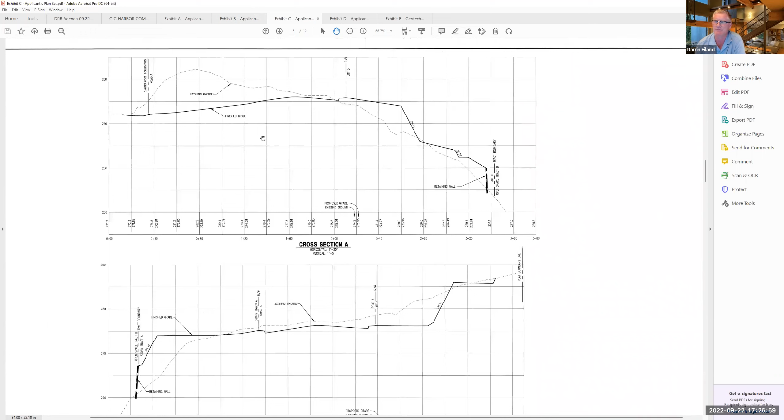And so looking at this, basically everything in here, I don't know if they necessarily correspond with your cross sections. The cross sections may need to be updated. As I was looking at that, I was saying, okay, I'm not quite tracking with that, but I'll take these to be more the design intent right now.

And I didn't find any, I didn't take any exception with what you're doing here on the south and the eastern part on the backside of these lots. What I was maybe curious about, as it relates to this area where you're retaining trees, I don't know if any other DRB members have either had a chance to look at Google Earth Street View or been up Canterwood Boulevard and specifically looked at that wall that's there now.

My initial impression of that wall is that it's not that attractive. It does get pretty tall in one spot. And I think since they're going to move it over in order to get some frontage improvements, sidewalks and so forth, it might be an opportunity in this area where it's keynoted to be at 8 feet and 9 feet plus, and specifically some of these areas that are close to that entrance. And I think they're going to be basically right up against the sidewalk that's coming here. Would it be an opportunity to consider a step location in lieu of retaining some of the trees?

And so here comes the dilemma, right? If you push it back and you replant it where maybe this side of the entrance is replanted similarly, it's sort of a trade-off. So I'm just bringing this idea up because I think the wall is right in your face, and we do have some examples in the city, specifically coming up to Burnham at that roundabout by the Sportsman Club, that is excessively high, and there's just no way around that. But I don't think we would like to see that as the norm moving forward, if we can, if there's some way to soften those impacts a little bit.

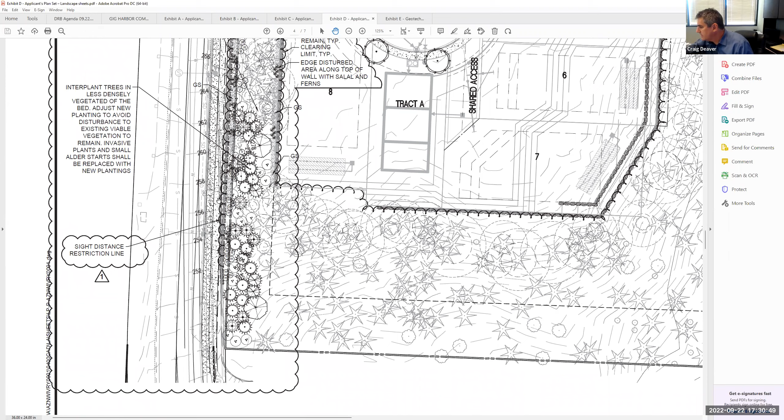No, there's a buffer, isn't there? Yeah, we have a buffer, and then there's a sidewalk. There's a planting buffer, but I don't believe we propose any trees in it. Okay. Yeah, the reason I ask is just in terms of that wall and softening that look.

Some trees in that space would help with that, because I agree that is a harsh wall as you drive by it. So a couple things, if I may, I don't want to speak out of turn, so tell me to be quiet and I will.

But the issue here with this wall is that it meanders in right away and then meanders off right away to the south. And so once we touch it and start messing with it, right there, you see where it curves there? It tapers onto the adjacent property.

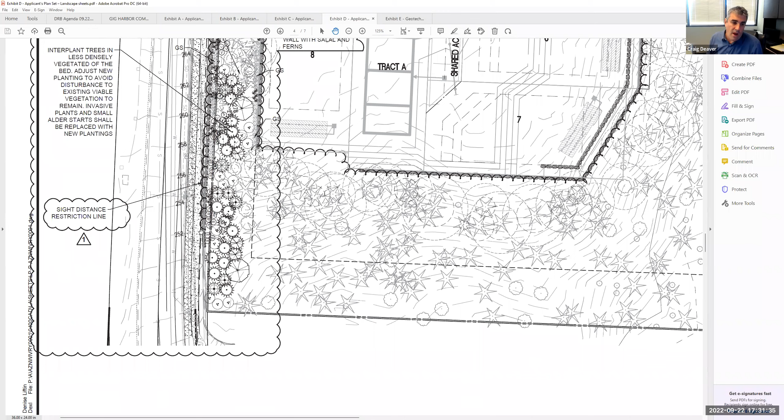So I don't entirely control it. And the next thing I'd like to say is I'm not opposed to stepping the wall, but the problem is that wall is really in there for Canterwood Boulevard, and the wall right now, at least adjacent to our site, has been placed in the right of way as required by the city design standards. If we tier it, a portion of that wall will be a structural wall located in that buffer, which, as you guys know, will have some planting issues, but also that'll be a structural element of that roadway, which will be on private property. So there'll either need to be some sort of easement or something that will allow maintenance of that wall onto the property, or for the city to come in and maintain it if there's ever an issue.

So Craig, you're saying that you have to relocate it and it still gets relocated. This is the property line that's here, right? So you're still in the right of way right here. And if we did have to step it, this wall would stay potentially here, but lower.

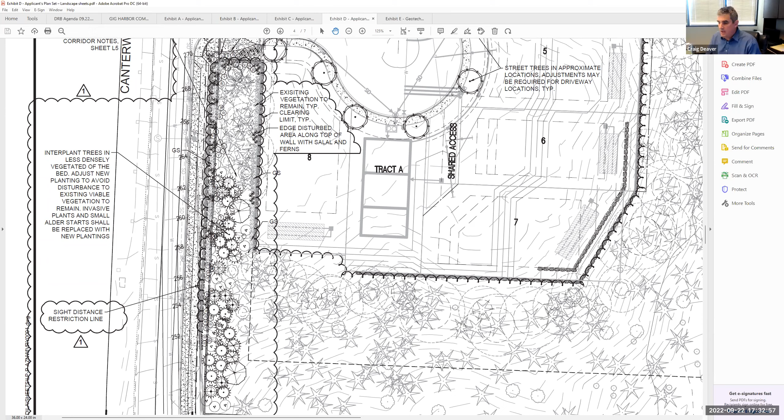And then the second wall would be on the property. Yeah, a tiered wall would place it because you would have to be at least the height of the wall back from the other wall. If you did two 4-footers, you would have a 4-foot wall, then a 4-foot gap, then another 4-foot wall.

Well, I can't speak for Jeff Langhelm and his group at Public Works, but it seems like there could be something that could be done there. I know there's lots of examples within the right of way where the walls are pretty tall, and we've actually had some pretty terse discussions about why Public Works decides to do it that way when the design manual says another way.

So, from a design standpoint, we can't speak to what Public Works would allow or not allow, but it seems like if we could step that wall in these zones, I don't know if it needs to be down in this area. Obviously this is the existing. Is it in this position here still? Yeah, or if you relocate it, could it go there?

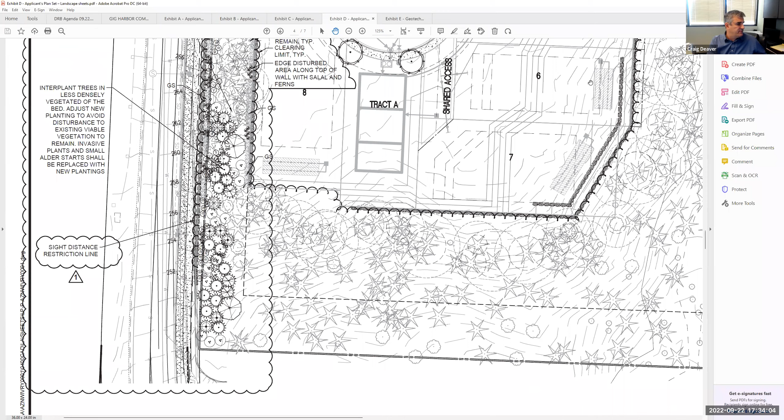If you don't mind, do you have my civil plans? Could you go to sheet C, or sheet 3 of the 19 sheet set? I think that's sheet 3. Yeah, you can see the wall down here in the southwest corner. You can really see it there. If you could zoom in on that portion there.

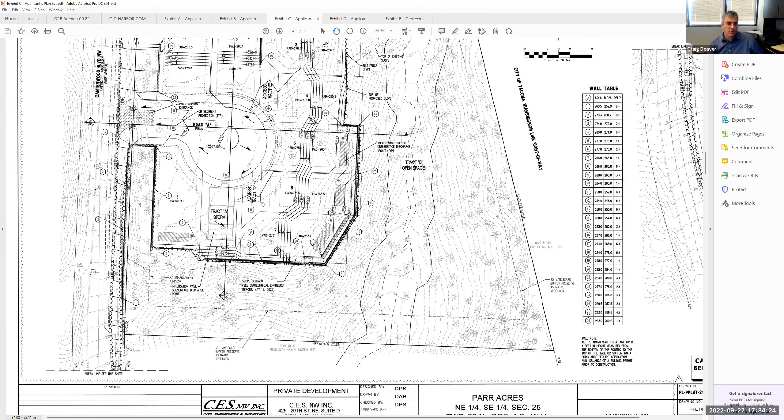Is it 10 feet tall in that corner? Yeah. So this is the existing wall. You can see how it tapers, and the darker wall is our wall. That right there is the end of the existing wall, and the darker wall is our proposed wall. We're just shifting that wall to be more parallel, excuse me, to the right-of-way line. Okay, well, I know that the existing wall probably is also the same height you're talking about. It looks tall, getting into the 8-9 feet plus.

And it's not just 8-9 feet, it does slope up from there as well. So it does look rather, you have all this vegetation up there, and then slope, and then the wall, and it's rather looming over Canterwood there.

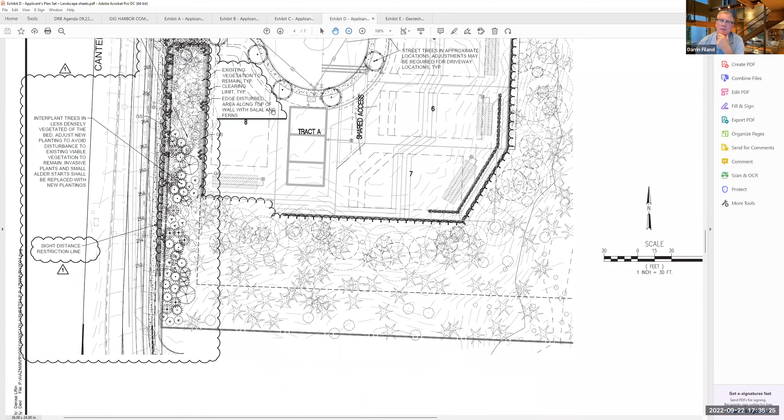Okay, I'll go back to the landscaping plan, I think it's easier to see everything. First we would ask the DRB if the wall, currently designed right at the right of way, is acceptable. We have allowed taller walls here and there, but most often they've been located at the back of the site where nobody sees them. In this case, it's right out in plain view, with just a mow strip, some planting, and a sidewalk right next to it, so you'll see it in its glory.

Craig, is this going to be a brand new block wall or relocating the existing material? I believe we're going to have to make it a brand new wall. Okay.

So if the wall in this area were stepped, what we're conceding is that any trees in this zone, if that topography needed to be changed, we'd be losing more of those existing trees. My thought is if this is planted here, we could replicate some of that in here. I think a better long-term solution would be lower walls, say two 4-footers stepped back with landscaping, for a softer impact. We're already looking at changing the grading here with some enhancement with landscaping.

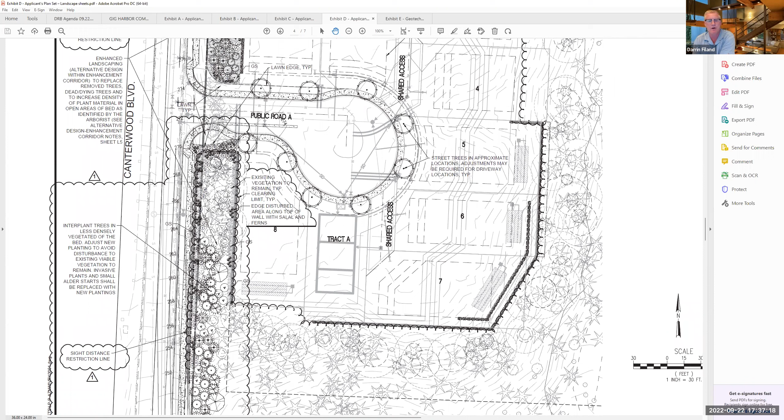John's already commented. I don't know if Brianne or Marlene have anything. Marlene, can you see anything on your phone? Yes, I can see, thank you. I can't see well enough to say I could redesign it right here.

I think we have tried to minimize those tall walls. The fact that you're doing so much significant work on the site maybe gives us an opportunity to minimize those walls.

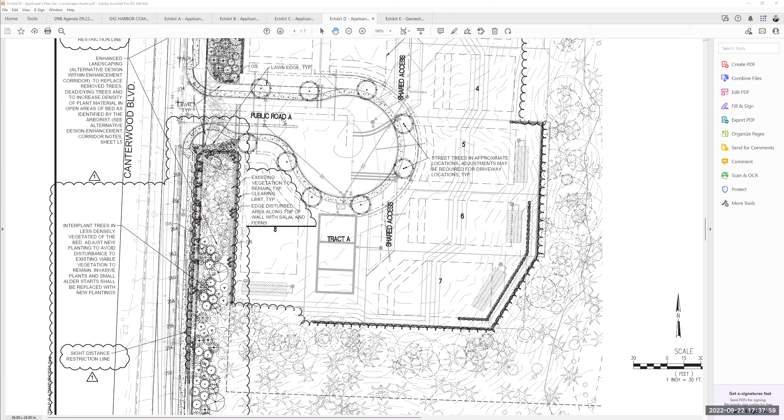So can I ask a quick question? What you're suggesting is that we remove all the trees there, knock that slope area down to match what's going onto our site, and then put in a tiered wall through there, so all those trees would go. We would do a tiered wall system, a rockery or whatever it would be, and then replant that area with trees.

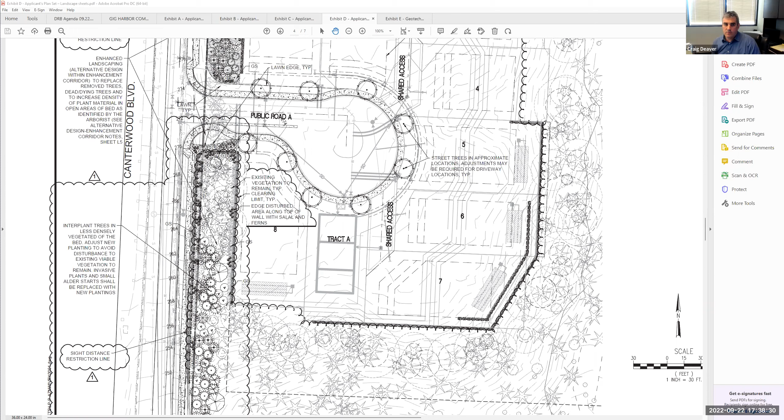Or here at shrub, looking at your keynotes, this wall at this height is 8.5 feet up, and then we're basically at 9.6 running along here. So if we were to split that in half, and as you said, come back 4 feet, I guess it'd be like laying it in here.

Craig, we're just asking a question - if you cut this section here while leaving the topography, are all these trees on the eastern side of this zone also in jeopardy? Yes, because as you move the wall back, you're moving it into a hillside that's even taller than where you're leaving it - it's 4 or 5 feet taller where you're suggesting to move the wall back, so that wall will have to be even taller. Instead of an 8-foot wall, you're looking at an 11 or 12-foot tall total wall, but it's tiered.

That's why I was suggesting kind of knocking the knob off, because there's a high point right where your hand is - a knob right there. If we cut that off, remove all the trees, tier two walls, and then replant it - trees don't really go that well with walls, so we'd be looking at some sort of wall-friendly plants.

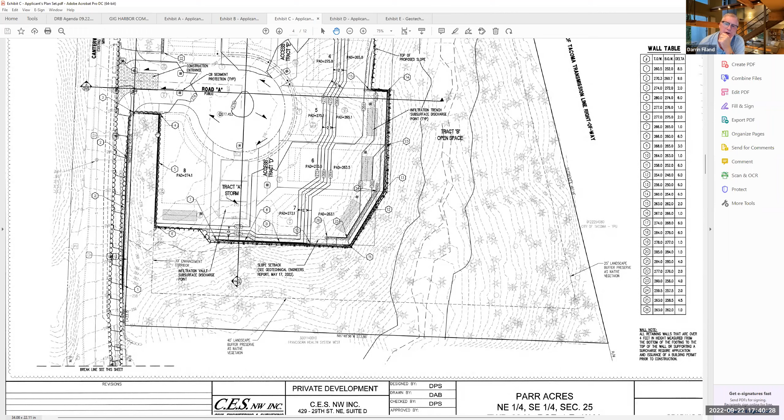How does your lot 8 relate from a topographic standpoint to this area - does it sit lower? Yes, it is lower by about 5, 6, 7 feet. And you have a wall here? Yes, I do, to save the trees as well. Well, that makes a lot of sense. I honestly agree.

Harsh, but I'm thinking we take this nub off of here and you wouldn't need this wall, and we can make this lower and replant this like that. I think it's totally a better solution.

Yeah, I'm only one member. So, no, I agree. We did propose something like that at the time, and we were indicated we had to save the tree corridor, the enhancement corridor, to the best of our ability.

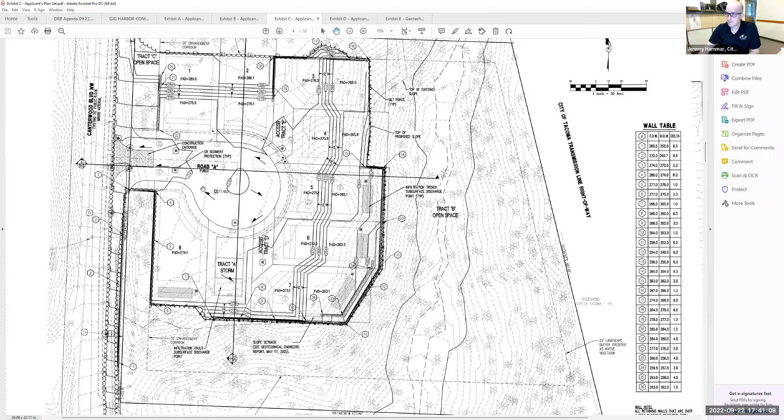All right, well, so any more thought, I guess, from members on that? I was going to bring up Google Earth here and kind of throw that little street view in there for a second. I might be able to just pop it over there. I'll just drag it over here.

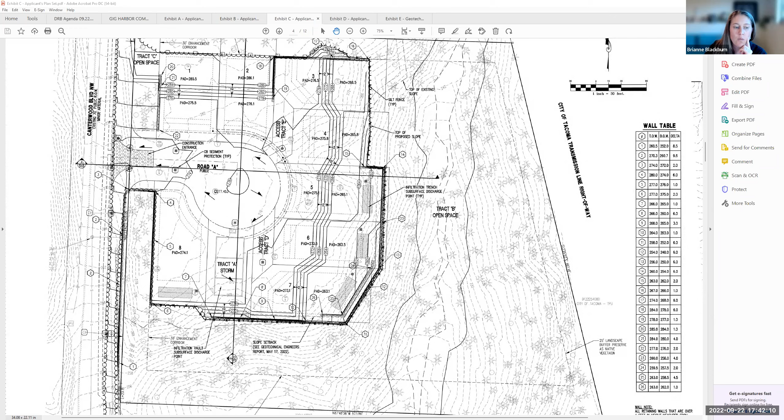This is the wall we're talking about that's there now, right? We're not able to see your street view. We're still seeing the plan set. Maybe I gotta get all the way over. You might have just shared the plan set window, you might have to stop sharing and reshare. Let's try that again. Now we'll try. I can see it. Can you see it now? Mhm, all right, we can see it.

Can I make just a statement while you're going up this hill really quick? I want to point out that the road is not symmetrical with the actual right of way. This road actually diverges from the center line of the right of way, and the wall diverges away from the right of way, and we're putting it back parallel to the right of way. Yeah, okay, fair enough.

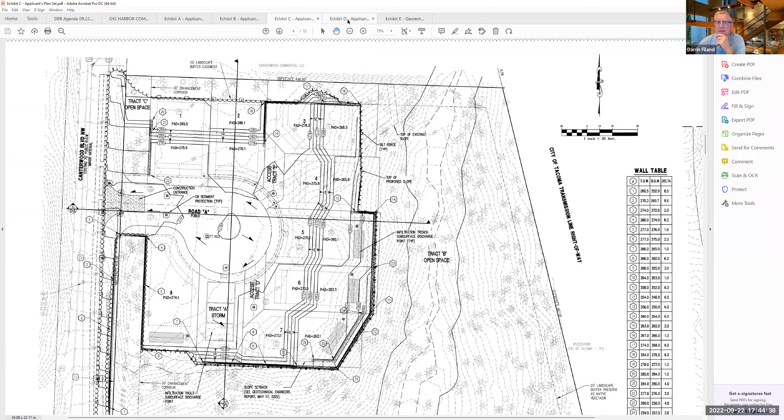My thought on it is that having a tall wall here and then another wall here where it steps back down to save these trees, while I think it's commendable, if we were talking about some really special species in here, then I'd say let's do our best to keep them. But I think this in time will be beautiful, probably even in like a 5-year window, filling in nicely. It seems like we could get something similar in here by taking this knoll out of this. So that's my take on it.

So I have one question. The roof line of the house that's going to be there - so it's going to be a daylight basement, correct? That one's not a daylight, that's a flat padded site.

Okay, so if you were driving down Canterwood and you had a 6-foot wall with 10-foot trees, 8 to 10-foot trees, how much of the roof line and building would you see, since it's kind of down a little bit lower off the knob? You wouldn't see much of that house. So that to me is probably the more important thing - you aren't staring at the side of a house versus the trees that are there right now. So I agree with Darrin.

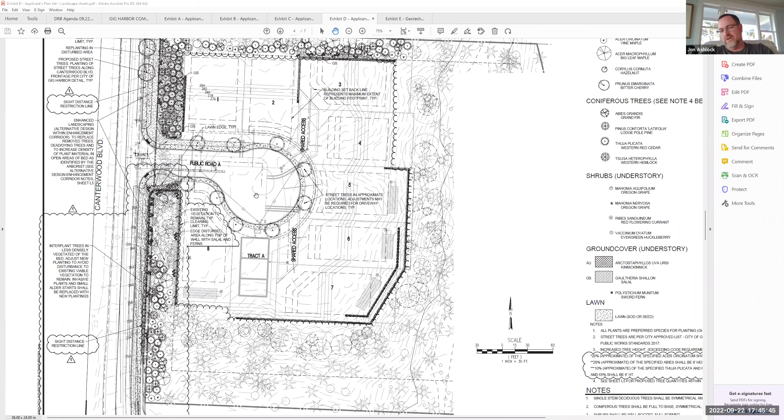If you flatten the knob and get a smaller wall, and then add in trees so you block the view of the house, I think that is superior than what we have right now. Just to be clear, under the current scenario, the house would be pretty much obscured by the walls and the trees being saved, plus the shrubs being replanted. If we come in and knock that knob down and lessen the walls, you're going to see more of the house under the suggested scenario.

Until the trees are grown in, though, right? Until then, but I still think you're going to see more of the house regardless if we take the knob down. I just want to be very clear on that. I like the idea of taking the knob down and getting rid of the walls, but I want to be clear: you're going to see more of the house in the scenario you just suggested.

But to be fair, Craig, would you say we'd see maybe a similar amount of the house on lot 8 as we would on lot 1? Sure. Because this is 278 right out at the road, and there's a 278 contour, it's pretty much right at grade. Yes, you'll see about a similar amount.

So it'd be a consistent frontage, and we've got a bunch of development that's happened on the west side and in Gig Harbor North over time, and it's a little shocking when we take out some trees. The community does notice, and we've had definitely some heated discussions about that. But in time, if it's a well-planted plan that really adds back a significant amount of vegetation, I think we can really see those benefits within a short window, within a 5-year span.

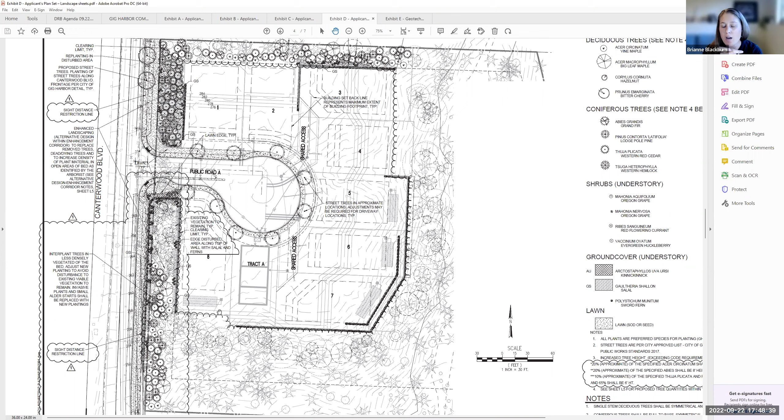When we were talking about knocking that knob down, can you help quantify what we're talking about? How far are we talking, pulling that down? The current pad is at 274. There's a high point of about 280.5, so you're talking 6 to 7 feet right there, right where that hand is. That will be cut out and lessened down to about 274.

Where's our road grade? You're still going to have a wall there of 6 to 8 feet, and it'll have to be tiered. The problem I see is getting city public works on board for a tiered wall, partly on public right of way and the other part on private property.

If you knock the knob off, do you need to have the tiered wall or not? I will need to have a tiered wall still, yes, because the knob is only getting rid of the mound that sits up so high. As I move the wall back in, that's going to help with the height of that wall. So you're still going to be looking at probably two 4-foot high stacked walls.

They'd probably be rockery, and they could probably be rockery at that point instead of that big sheer face you're looking at now. Well, definitely a natural rock wall would be more aesthetically pleasing than the block wall.

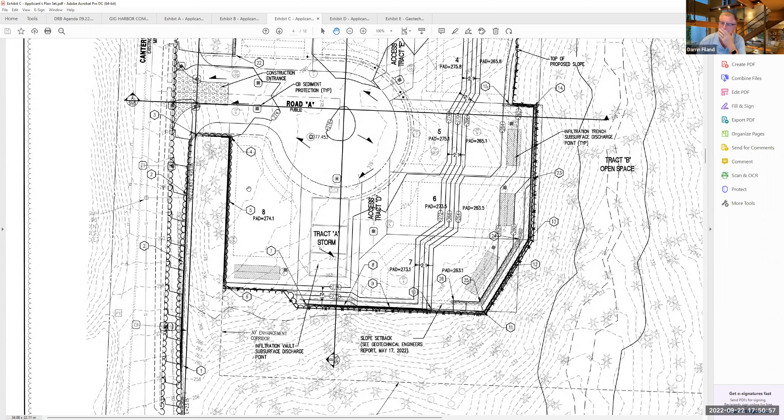Okay, any other comments? So I knew these two issues would tie together a little bit, so.

Okay, let's go back to the two points, findings and city recommendations. So the retaining significant trees, we talked about that. We felt the plan as proposed was a good alternative.

In regards to looking at the natural site conditions, I think we're maybe asking that where the wall got a little bit tall at the right of way, that we could look at maybe having a stepped wall condition there, by allowing more of the grading to be adjusted there, and thus losing some of those existing trees that would have been retained. And then we'd be asking for an alternative planting plan that would be similar to what was located on the north side of the entry drive to the site.

I don't know if this is something, Jeremy — if we're asking for a bit of a change, would this be something we'd necessarily need to see again, or can we write in our findings, in essence, design guidance on how to proceed forward?

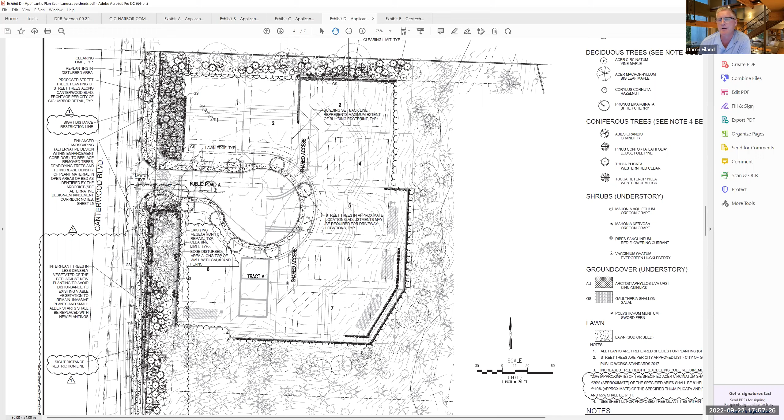So a friendly amendment to my motion, to include language that would require that if any other significant trees had to be removed through the course of the project that weren't part of this plan, they be replaced in kind with a similar planting plan as proposed in those new areas. Did I capture that right, Marlene?

You sure did. Okay, so that's been amended. Any other discussion or amendments for the motion? We'll call for the question. All in favor? Aye. I think that was unanimous.

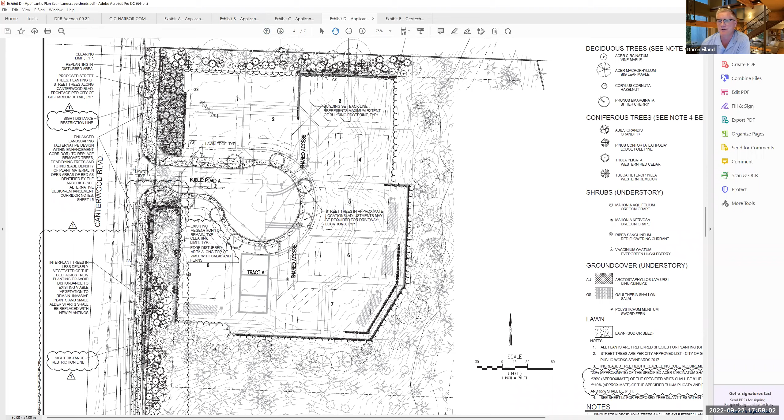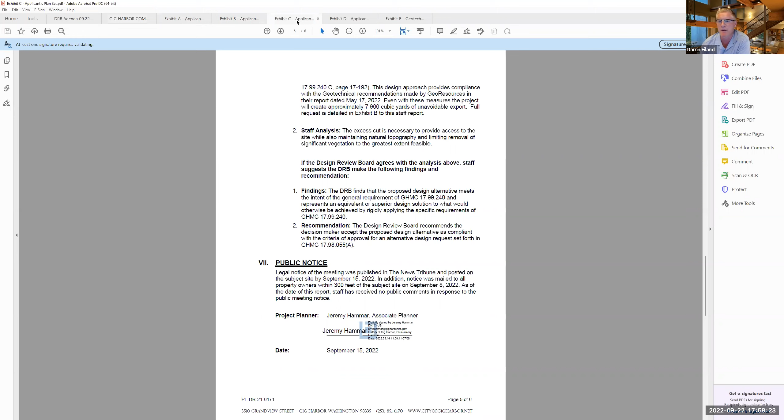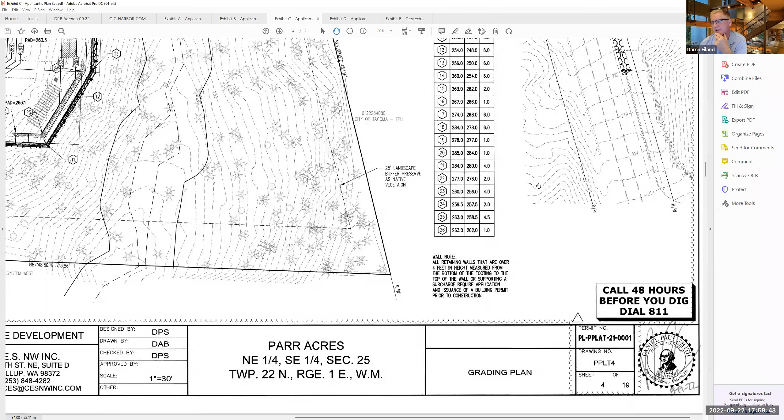Okay, so we got through the first one. Now on the natural site conditions, I think the staff's findings basically said it's similar to the other one, and meets the intent of the code. But moving to our proposed plan, I'll try to describe this verbally, referring to drawing sheet 4 of 19 in the civil drawing set.

And we're looking at the existing right-of-way retaining wall that is being relocated to make way for frontage improvements. Now I'm going to talk through this, Jeremy, because I'm going to try to start a motion, and we'll see if we can craft something here that we'd like to see proposed.

We'd like to see the design modified to be a terraced retaining wall, preferably in natural stone, and concurrently the topography of the area east of the right-of-way and south of the entry drive may be allowed to be lowered, and subsequently those existing trees removed in order to achieve the tiered retaining wall assembly at the right-of-way, attempting to keep walls at 6 feet high or lower as it faces the right-of-way. In addition, the area would then be replanted similarly to the planting plan proposed for the north side of the entry driveway along the right-of-way. That's about as many words as I can throw in there.

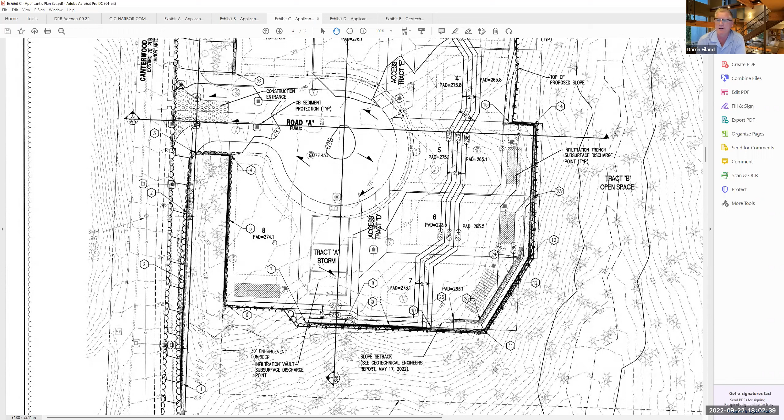Okay. Yeah, if Public Works says no to it, I'd like them to come back to us with other ideas, other options, personally. Concur. Okay, great. Any more discussion? I'll call for the question. All in favor? Aye. Aye. That's unanimous. Okay, all right, so I'm gonna stop sharing.

And I think that went pretty well. I appreciate everybody's comments on that. Sometimes these seem maybe like they're simple and then they end up being a little more complicated in our discussions. Craig, do you think you have enough based on the proposal here and our recommendations?

Yes, I do. I think we're sketching it out, but I just really want to make sure you guys are aware that we don't control the southwesterly portion of that wall. It's on the hospital property, and we're going to tie into it, but we can't manipulate it without their approval. We'll do what we can, but that's just something. So I don't want you guys to drive by there and say, why did they remove that wall and redo that wall? We don't control that.

Okay, right, anyway, I appreciate your time on this too. And I really do appreciate you being able to do this over Zoom or whatever we're on today.